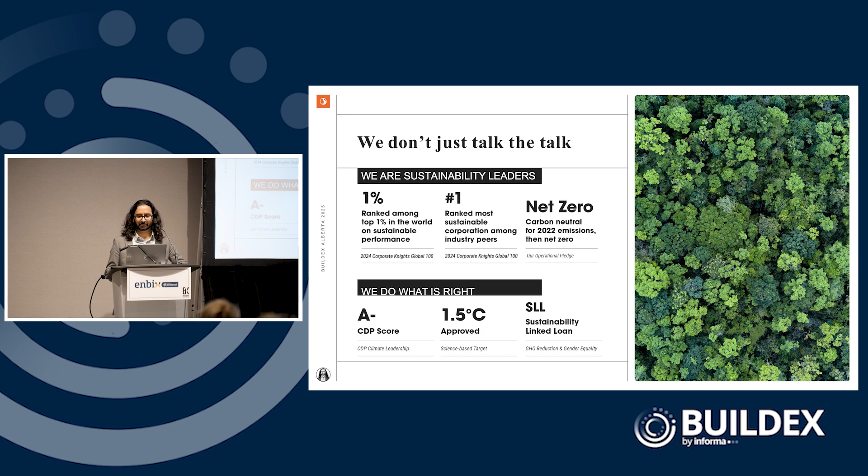At Stantec, we're truly sustainability leaders. We don't just talk the talk, we walk the talk. We're committed to net zero and science-based targets, and we're ranked amongst the top among our colleagues as well. So Stantec has signed onto various commitments that tie into all those goals, targets set by architects for the architects and by engineers for the engineers. These industry pledges help guide our work in carbon, climate, and equity.

So getting into the presentation, what are we going to learn about today? We'll look at rethinking our design strategies potentially for schools in Alberta, and the impact on energy performance and embodied carbon in school design, as well as looking at potentially modifying our approach with a focus on occupancy to improve design influence. We're also going to be looking at comparing different school rating systems and lessons learned from other jurisdictions that we can bring to our projects from day one.

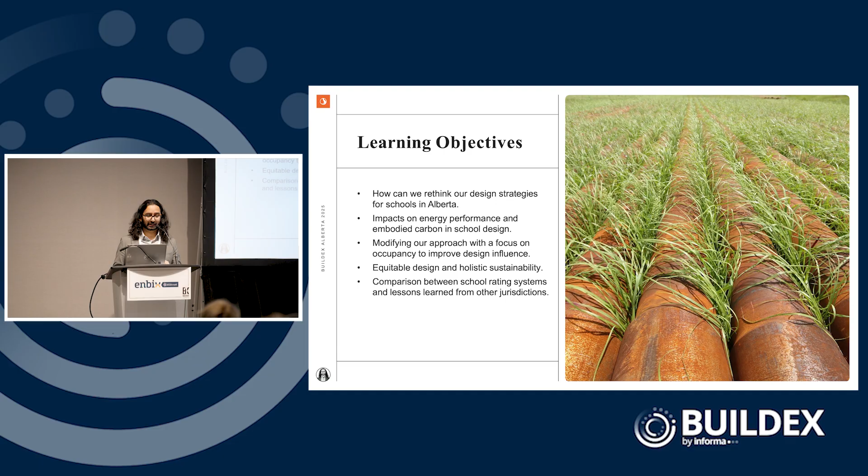So as we begin to get into this, why does this matter? The schools that we're designing and building today are where our children are going to spend most of their time. It is our responsibility to provide them an optimal, healthy, and efficient learning and teaching environment. As we looked at all those building commitments that our industry is tied to, you see 2030 a lot. And 2030 is just 50 months away.

Let that sink in. So 2030 is when we have declared that all buildings must be net zero ready, and by 2050 we're trying to achieve net zero. There's a lot of work that we need to do as an industry.

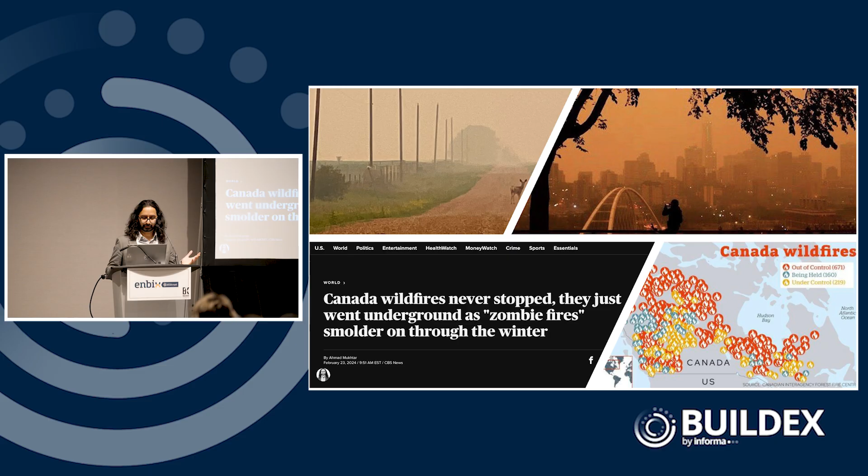As we look at understanding the impact of climate change, that's why those goals are there. It's not just warming that we're looking at. We're seeing a lot of wildfires, heat domes. We saw the wildfire that decimated Jasper. On the opposite end of the spectrum, we're seeing higher frequency of deep freeze as well. We're used to deep freeze, but they're increasing. Hailstorms - the damage from hailstorms has caused billions of dollars of damages.

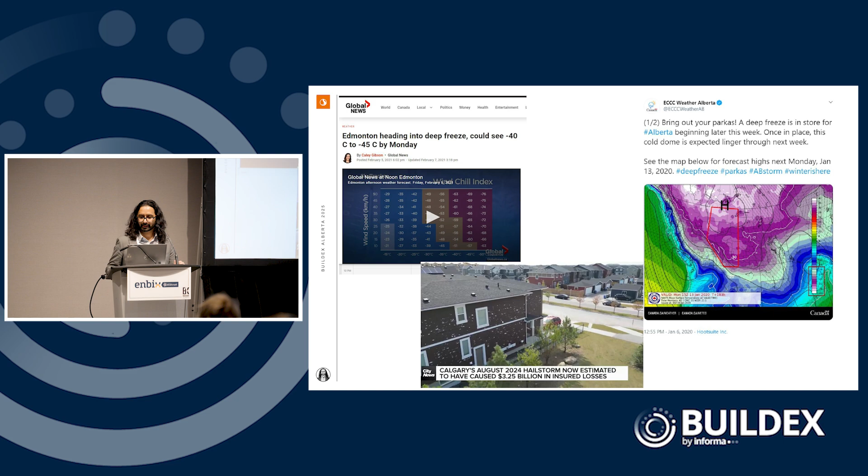So that's where sustainable buildings come in, when you're looking at more durable buildings that last longer and are more resilient to climate. With that, I'll hand this off to Colton to talk a bit more about background. Looking forward to your slides here. Thanks, Peter.

All right, so before jumping into actual case studies, we want to provide you with some background that will help set the stage for the bulk of the presentation.

The inspiration behind this presentation was the announcement from the provincial government of a major investment into schools. We're anticipating that around 200,000 new enrollments in K-12 schools will happen over the next 7 years. With that, the government has promised an $8.6 billion investment in a school construction accelerator program that's anticipated to deliver or retrofit more than 100 new schools across the province.

So these new schools or modernized facilities are there to ensure that students and teachers have the necessary space and resources for learning and to reduce overcrowding that we're seeing in our schools today. So our team thought, is this a chance to review how we design schools and reevaluate the sustainability and performance criteria that governs design to see if there's room to improve?

Looking at our current approach to energy performance in schools, there's a bunch of different standards and codes that dictate the energy performance and sustainability requirements of our school designs. Looking at provincial regulations, we've got the NECB 2020, which sets minimum performance requirements for all buildings across Alberta. We've also got school design policies such as the Alberta Infrastructure TDR requirements that set specific requirements for schools. These outline specific sustainability criteria such as certifying with LEED version 4.1 and having mandatory specific LEED credits that need to be applied to all schools.

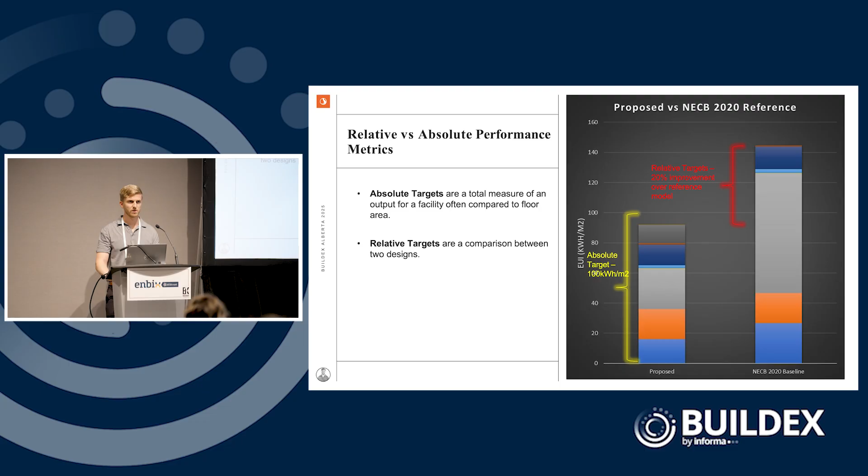But Peter and I, developing this presentation, we're asking how can we better influence design? So are our current codes and standards helping us effectively influence design? Are our current relative savings or absolute targets the best metrics to use when designing schools and other buildings? Are we designing buildings with the proper lens, or can we adjust to improve our actual design processes? And can we as sustainability consultants, energy performance professionals, climate analysts be involved earlier to influence and optimize energy performance throughout the design process?

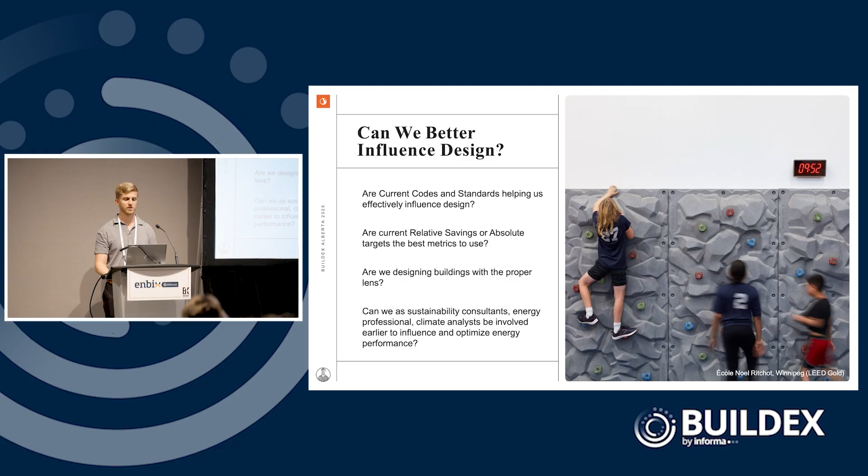Now, I'm sure we've all seen a graph similar to this where we're looking at the ability of our professionals and designers to influence outcomes. So looking at the y-axis, the ability to influence the design, and the project evolution on the x-axis, what we see is we can better influence designs earlier on during the design process, and as design progresses, we lose that ability to properly influence design, or our influence is more costly to the actual construction of a facility.

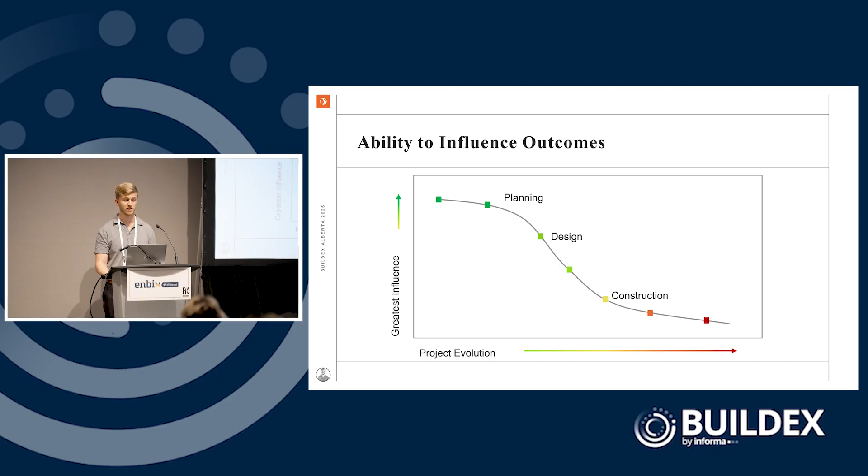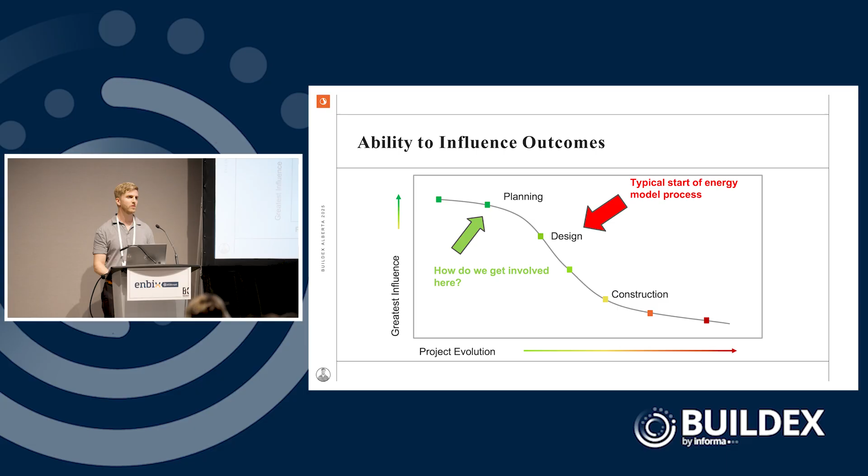So here's our typical starting process for an energy modeler being involved in the design as an energy modeling professional. We typically get involved during conceptual design or schematic design, where we develop a simple box model or energy model using floor plans or preliminary floor plans and design narratives. But how can we get involved earlier to better influence design as energy modeling professionals?

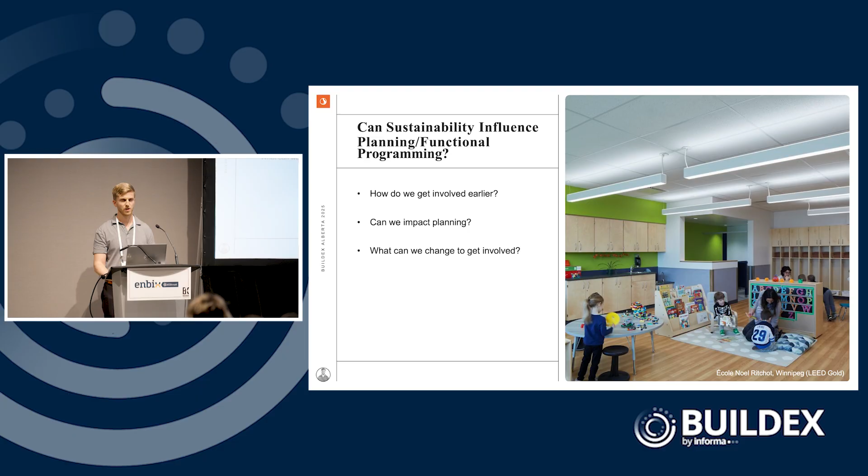So some questions that we asked are, can sustainability influence planning and functional programming? So how do we get involved earlier as design professionals? Can we impact planning, and what can we change in our processes to provide that value and get involved earlier to influence design?

Now, one of the questions we asked ourselves when putting this presentation together is, are we designing buildings too large? Are our schools and facilities being designed appropriately sized for the occupancy intended for the space? Can we improve our process by reevaluating energy and greenhouse gas emissions through a different lens? Is there a metric that would help us improve the design process with increased focus on sustainability and equity beyond what we're already using? And will this help reduce energy consumption and improve school environments for teachers, staff, and the students who are going to be occupying the space?

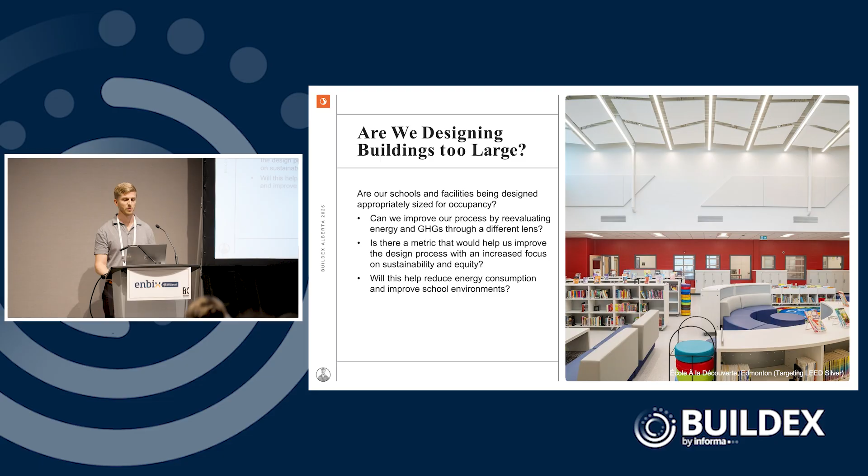So looking at potential new performance metrics that we could use to potentially influence the design. Our prior focus and our prior energy metrics that we've been using have a focus on per unit floor area. So this is EUI, GHGI, TEDI, and CEDI.

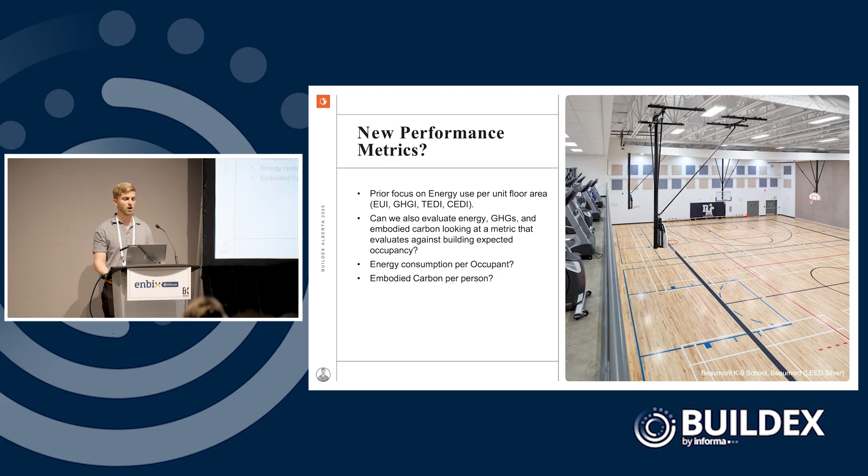But we asked, can we also evaluate energy, GHGs, and embodied carbon, looking at a metric that evaluates against building expected occupancy? So looking at energy consumption per occupant rather than floor area, and then embodied carbon per person rather than based on your overall floor area.

So jumping into the next section of the presentation, we'll look at evaluating designs based on occupancy instead of floor area. We'll start off with a simple hypothetical scenario comparing two schools using our historic metrics such as EUI and relative savings compared to the NECB, but also evaluating that school based off of the new metric that we're proposing, energy use per occupant, and seeing how those compare historically and with the new metric.

So looking at these two different schools, we've got school number one, it's about 1,000 meters square with 200 occupants. School number two, 2,000 meters squared, so double the size with the same amount of occupants set at 200. So evaluating those through the historical lens of EUI and relative savings, school number one's got an energy consumption of about 250,000 kilowatt hours. Now that translates to an EUI of 250 with relative savings of 18% over NECB.

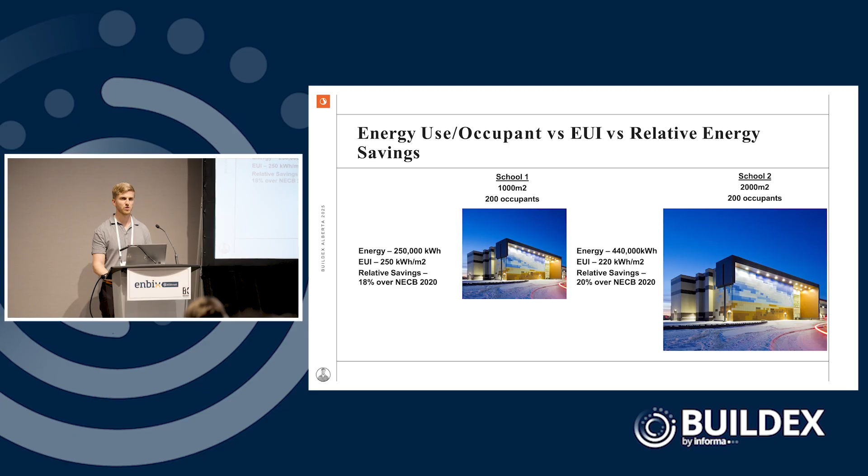Now, school number 2 is considerably larger and has energy consumption of about 440,000 kilowatt hours. The EUI is set at 220 kilowatt hours per meter squared, and the relative savings is about 20% compared to NECB 2020. So based off of the metrics that we've used in the past, school number 2 looks a lot better than school number 1 with that more energy efficient EUI and higher relative savings compared to code.

But if we change it up and evaluate that based off of energy use per occupant, we can see that school number 1 has a significantly lower energy use per occupant at 1,250 compared to school number 2, which is 2,200. So through this different lens, it completely changes our perspective on the design of these schools and how we're evaluating the energy performance.

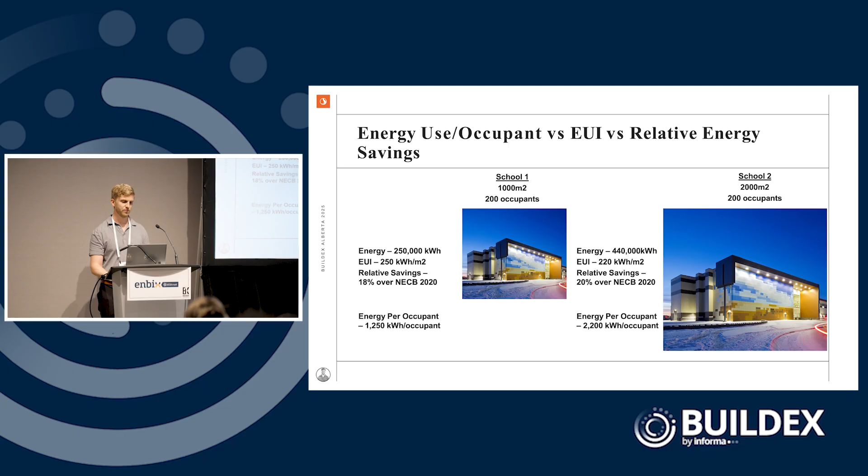Now, why talk about energy use per occupant or design per occupant? Well, it encourages design teams to really rethink the programming and sizing of rooms so that we can ensure we're adequately designing the spaces to be suitable for the occupancy that is intended to be used for. It improves designers' ability to reduce the overall energy consumption and reduces potential overuse of construction materials, saving costs and reducing embodied carbon where we're oversizing our spaces. And it increases equity across school designs, ensuring that all spaces are designed with the same intent.

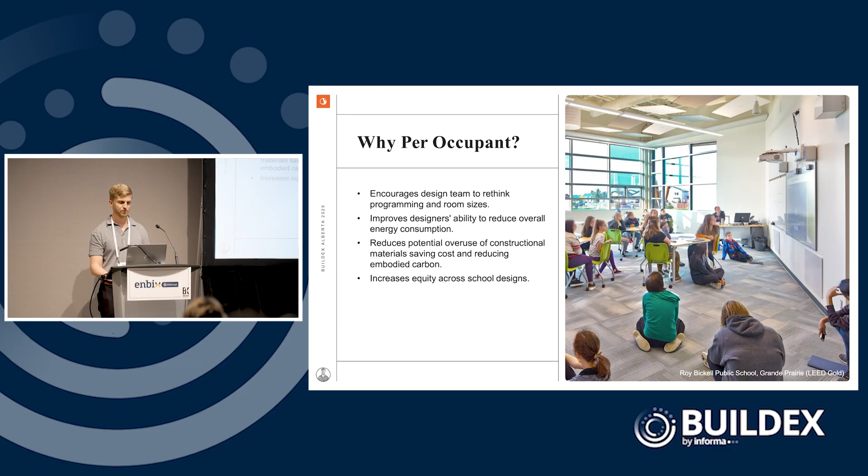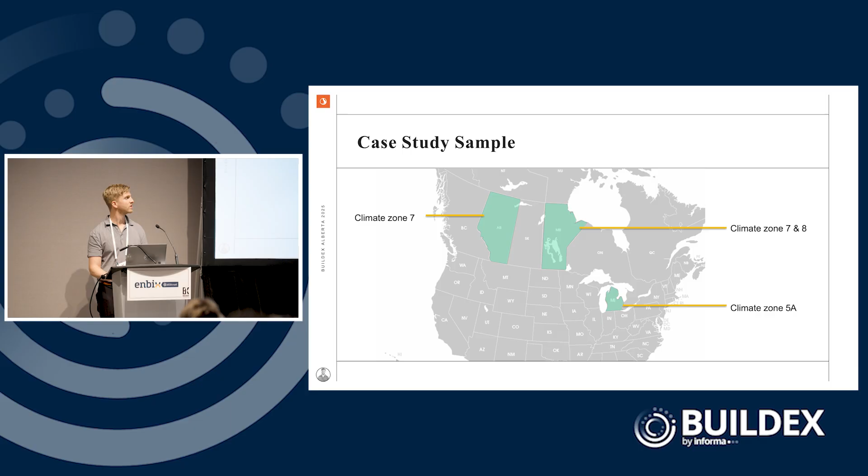Now, we'll move on to actual case studies where we're comparing actual schools that have been constructed and certified across multiple regions. So we've got a group of schools specifically designed and certified within Alberta that we'll be analyzing. We've also got a set of schools in rural Manitoba that we can cross-analyze with. And then another set of schools within Michigan that were very high performance that we'll use as a lessons learned tool to compare against our schools in Western Canada.

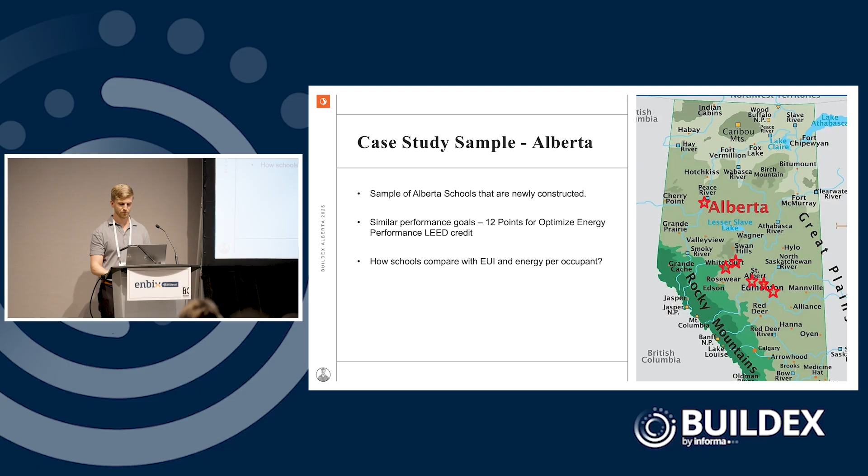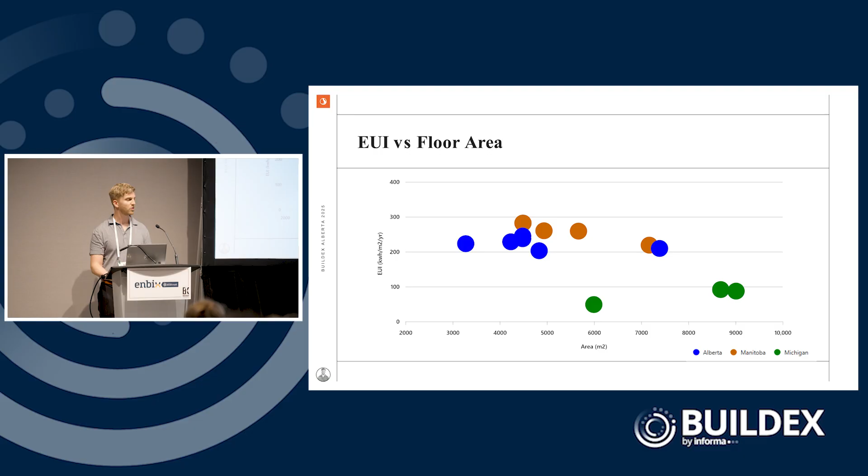So here is a data plot associated with all the different schools from different areas. The Alberta schools outlined in blue, the Manitoba schools outlined in orange, and the Michigan schools outlined in green. We can see that Alberta schools have a fairly consistent plot in terms of its EUI on the y-axis. When we look at the Manitoba schools, a little bit more energy intensive compared to the Alberta schools, so a little bit higher up on that y-axis. And then those high performance Michigan schools are quite low in comparison, and we'll dive into what these results really mean.

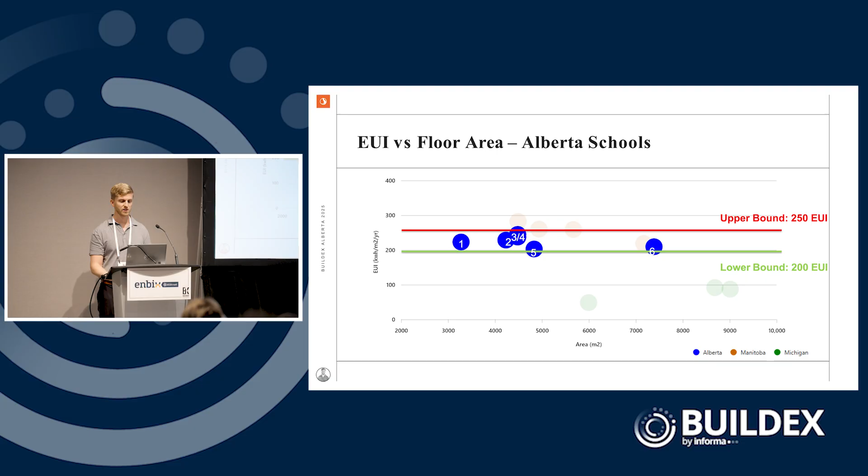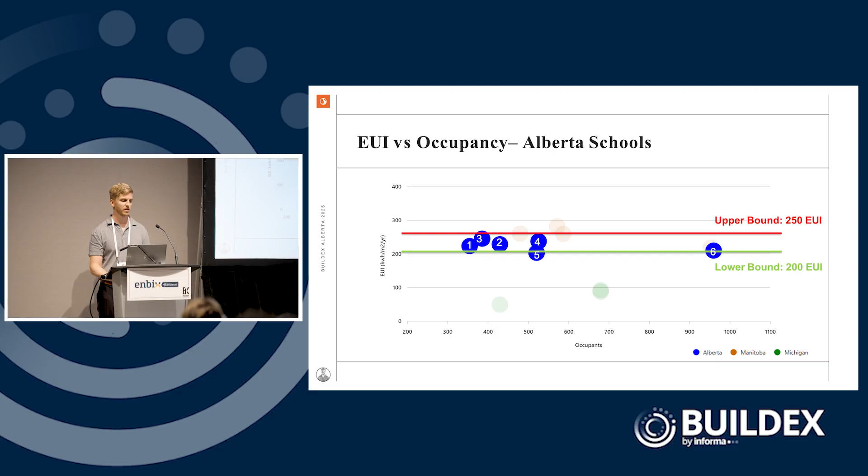So we still want to focus on the Alberta schools, so we'll dim out the other regions such as Manitoba and Michigan and really focus in on the Alberta schools that we've been involved in the design process for. So regardless of floor area associated with these schools, the EUI fits between two distinct boundaries. We've got the lower boundary at about 200, and that upper boundary of about 250. Now there's a 25% increase between that low boundary and the high boundary, showing fairly consistent results across these different schools. But when we shift to the next slide to show energy use intensity versus occupancy instead of floor area, you'll see that some of these dots deviate a little bit. And so based off this deviation, we were able to tell that there's definitely a change in perspective and lens associated with evaluating schools through the lens of occupancy as opposed to floor area.

Now changing up the y-axis to show energy use per occupant along the y-axis and floor area on the x-axis, we can see there's immediate change in the results when comparing through a different lens. There's a larger deviation from the upper bound to the lower bound when comparing energy use per occupant compared to the traditional floor area. Our EUI range at 200 to 250 showed a 25% difference in energy performance compared to all the schools. Now looking through occupancy, there's a 77% difference between our Alberta schools when viewing the building's energy consumption compared to occupancy.

And when comparing to Manitoba schools, which have a higher average EUI than Alberta schools, now they show a little bit lower energy use per occupant than our highest Alberta school that we see on the data plot.

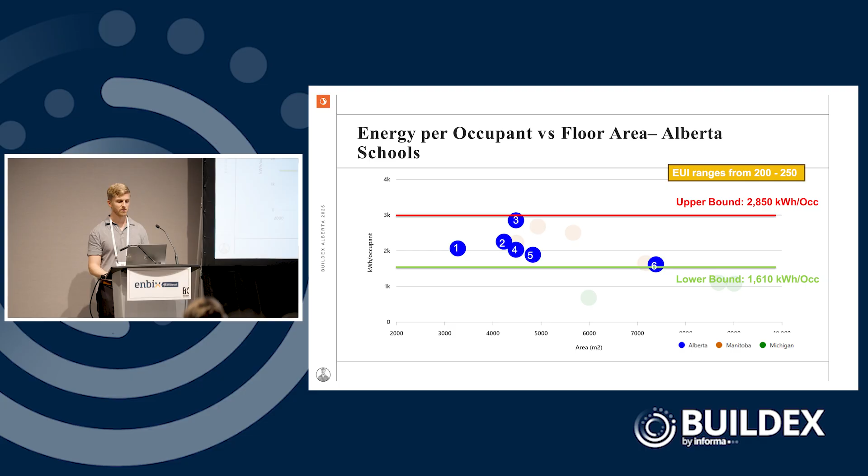Is the minimum performance similar to what we see in the BC step code appropriate, or does limiting building size too much create risk of designing spaces too small? Would a range with upper and lower bounds be more appropriate to design buildings within a boundary?

We still don't know. But by adopting this lens and benchmarking the available data through newly constructed schools and existing buildings, we believe designers can better position themselves to serve clients and ensure we are designing spaces that are better sized, providing a more equitable learning environment based on a more holistic view of energy use. This metric wouldn't necessarily be recommended to replace EUI or relative performance, but could be used as an additional tool in our energy modeling process to evaluate energy performance of schools.

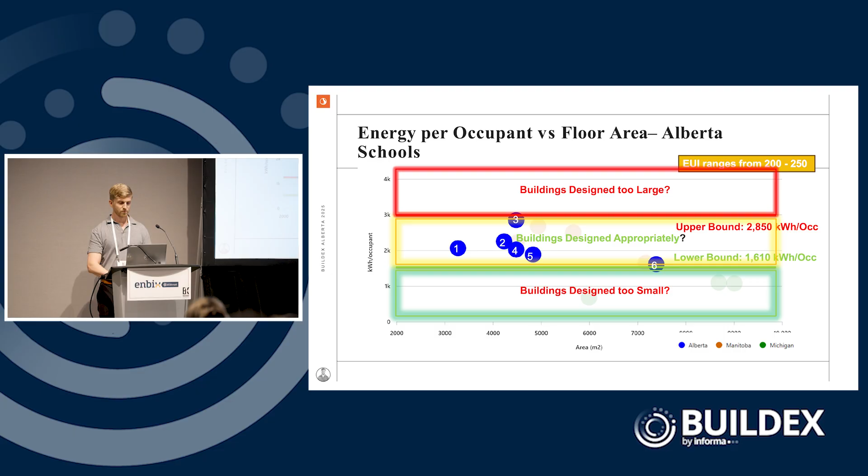Now, switching over to analyze the data points associated with the Michigan schools, the EUIs are very different than what we were seeing in Western Canada, so their EUI range has significantly decreased down to 49 to 92 compared to Alberta, which is around 200 to 250.

So how can we modify this new metric associated with energy use per occupant to work with changing performance requirements? Could it be used like step code with increasing performance so that when we're looking to achieve higher tiers of performance associated with building design, we also adjust that range to suit?

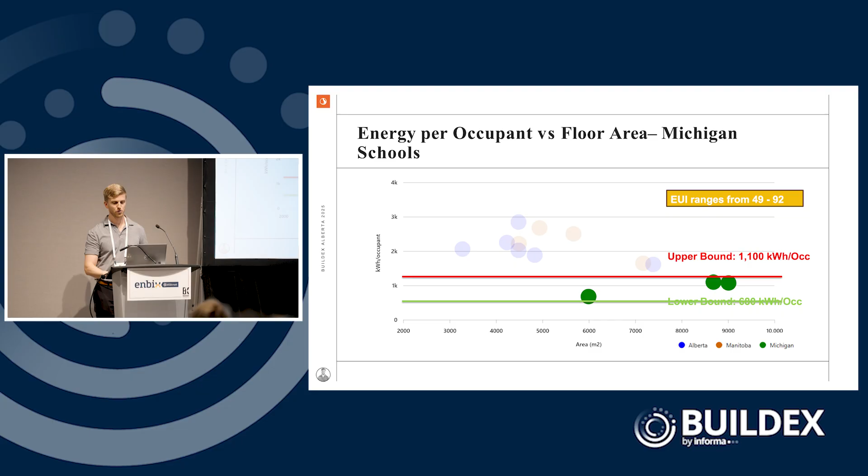So some considerations when comparing these different groups of schools. Our Alberta and Manitoba schools focused on traditional systems such as gas or electric boilers. Our Michigan schools, which are much higher performance, incorporated high performance electric systems such as air source heat pumps or geo-exchange heat pump systems with a bigger focus on long-term savings.

So these schools used tools such as life cycle cost analysis to evaluate lifelong or building-long costs rather than upfront costs to determine which mechanical system was most appropriate. They ended up going with those high performance alternatives rather than the traditional systems we often see in Alberta. Because they electrified their building, they also implemented a larger scale rooftop PV system to offset some of their increased electricity consumption, further reducing energy consumption and increasing the energy performance of their schools.

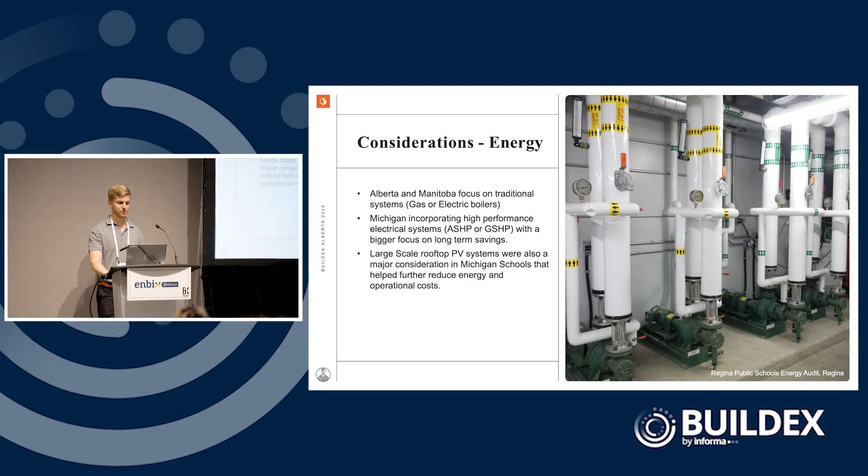Now, some other general considerations associated with school designs that may cause variations and influence different values in the performance of our buildings. There's differences in heating and cooling seasons even across Alberta, so we operate between climate zones 6 and 7. Depending on how far north or how far south you are, you might see variations in the performance of your schools that could dictate the energy performance of your building.

Facility programming requirements could also have an influence. So schools with shop classes compared to K-6 schools which don't have shop classes might have different energy consumption associated with those facility programming requirements. There's also consideration associated with expansion in the future. So if your school is anticipating a larger volume of students and we initially designed the school to have an expansion, that could influence energy consumption up front.

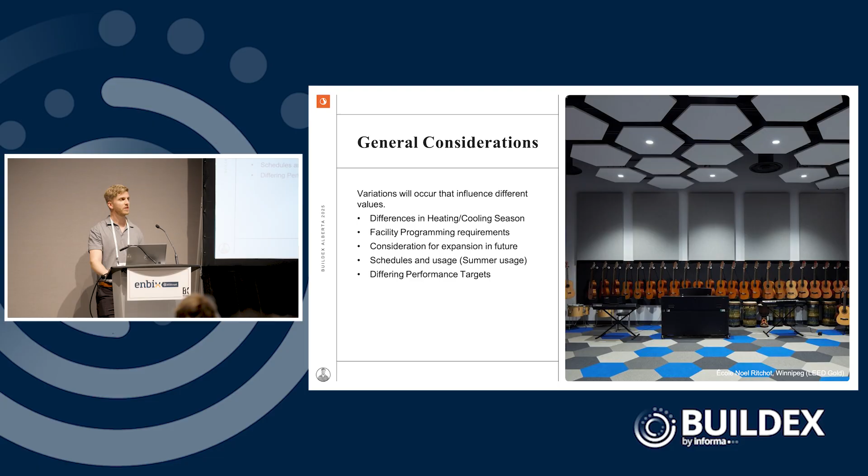And then school schedules and usage. Will the school be used during the summer? Will the school be shut down during the summer? Will it be shut down during the winter? Will the community be using it sometime in the afternoon or in the summer when it's historically shut down? This is also going to have an impact on your overall energy consumption.

And then differing performance targets. So if we have different performance targets dictating the energy performance and design of our schools, then we can see variations associated with our energy consumption. So I'll pass it off to Peter to talk about some of the more holistic sustainability requirements associated with school design.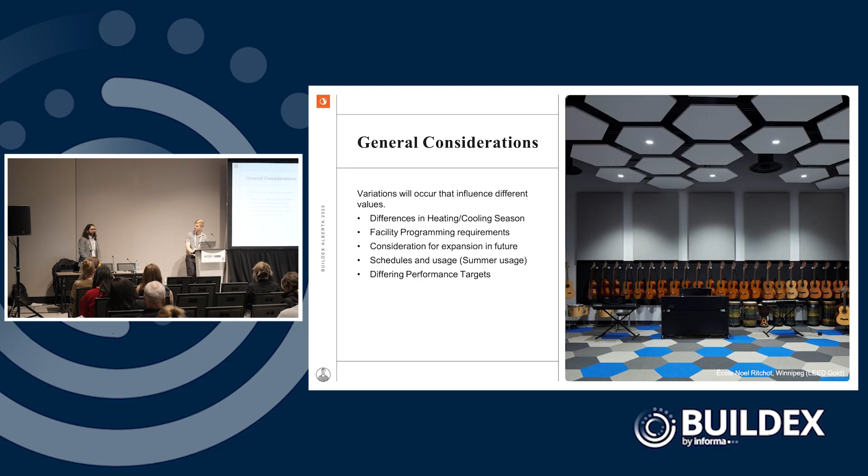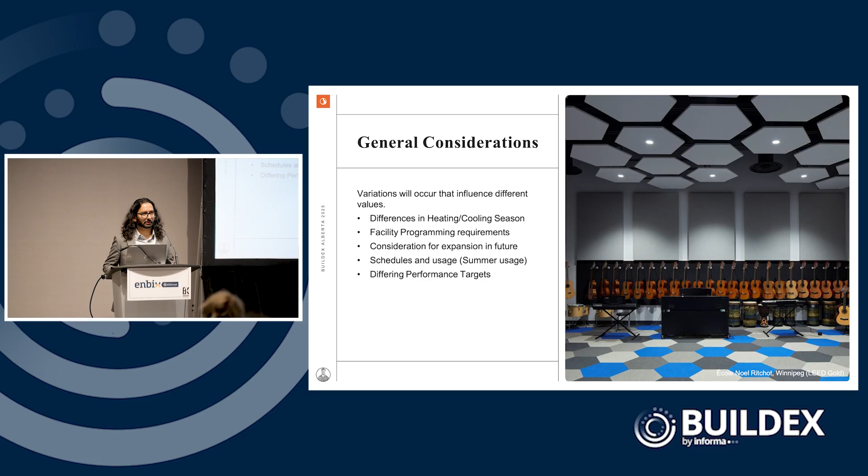Thank you, Colton. Lots of great data and some considerations that we can implement in our projects here. Now, Colton has walked us through operational carbon. Operational carbon is all the gas and electricity bills that make us angry, and we want to reduce those as much as possible, right?

So that's operational carbon. Now I'm moving towards the embodied carbon portion of the equation. Embodied carbon is basically the carbon associated with where your raw materials are sourced from, how far they travel to the manufacturing facility, and from there, how far they go to your project site, installation procedures - everything involved around the energy that goes into manufacturing, transportation, and installation of that product.

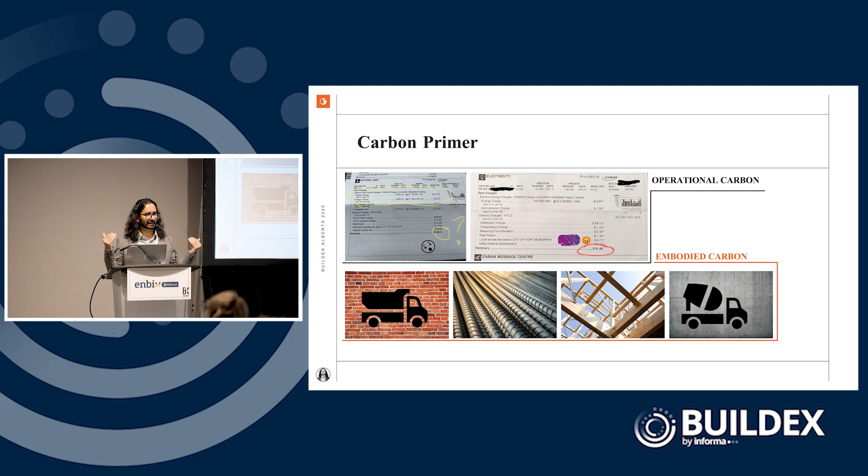The materials that we're surrounded with - drywall, concrete, steel, everything - already has embodied carbon in it. That's not carbon we can retrofit out. You have already spent that carbon. So we're going to be talking about embodied carbon here.

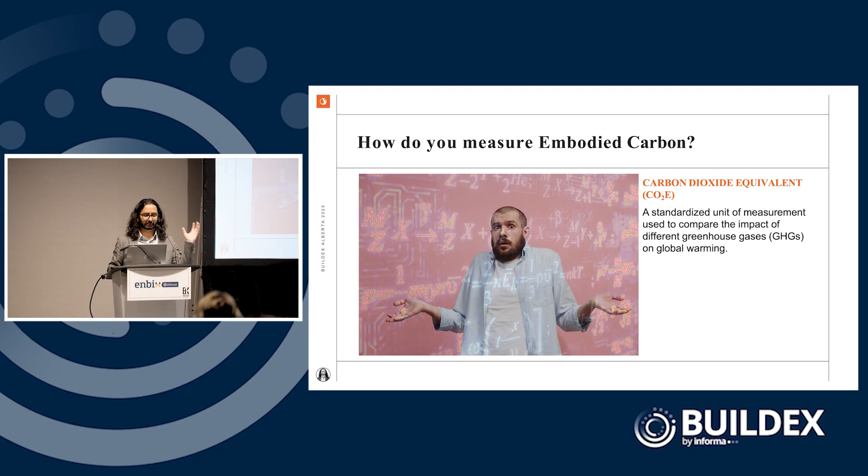Now, as we get into embodied carbon, how do you measure it? The measure you'll see in the next few slides is carbon dioxide equivalence. Why do we use this metric? Because there are other greenhouse gases we need to compare with, and we need an apples-to-apples comparison. So it's a standardized unit of measurement where other gases are given an equal proportion to have an apples-to-apples comparison.

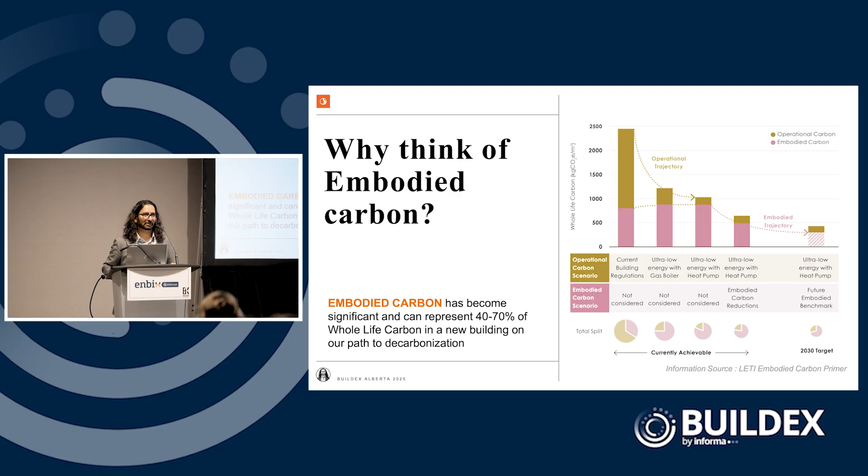Now, why do we want to think about embodied carbon? As Colton walked us through, energy codes are evolving and our buildings are getting more and more efficient. The more efficient our buildings become, the more important the conversation around embodied carbon becomes, because that could represent 40 to 70% of your total carbon in your building.

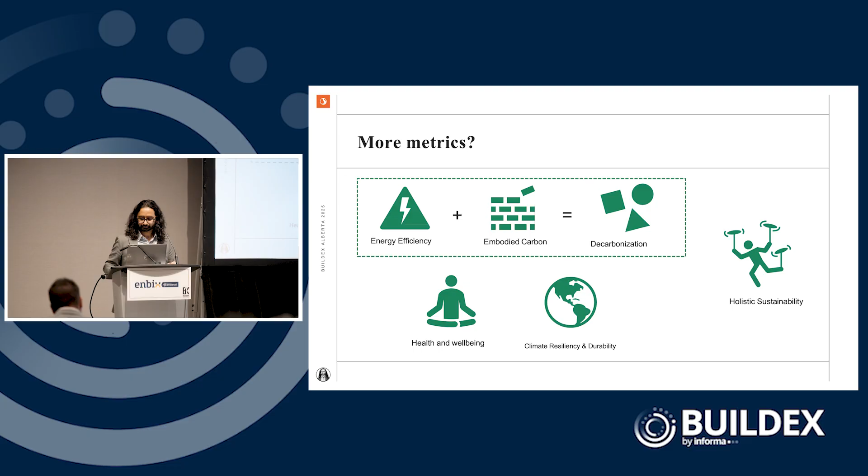So it's really important, a big part of the decarbonization equation. Decarbonization is a term you'll continue hearing over the last few years - it's basically operational carbon plus embodied carbon. A few other things I'll talk about shortly are health and well-being examples, climate resiliency and durability, and how we balance all of this with holistic sustainability. So let's get into a few more graphs here for the data nerds.

So there's a unique story to tell about these schools. They're located in northern Manitoba, and to get to these communities you have to access them through winter roads. If you need to get there in summer, you can only fly in. Think about all the logistics, procurement challenges, labor challenges, and everything involved around building these schools. We were able to keep our embodied carbon relatively low, as we'll look at in the next few slides.

For these, there was also a financial incentive in place, because if you reduce the amount of waste generated, you have to haul a lower amount of waste. At the same time, for transportation costs associated with materials, we incorporated a lightweight superstructure in these buildings that helped reduce embodied carbon, combined with a few other best practices we incorporated.

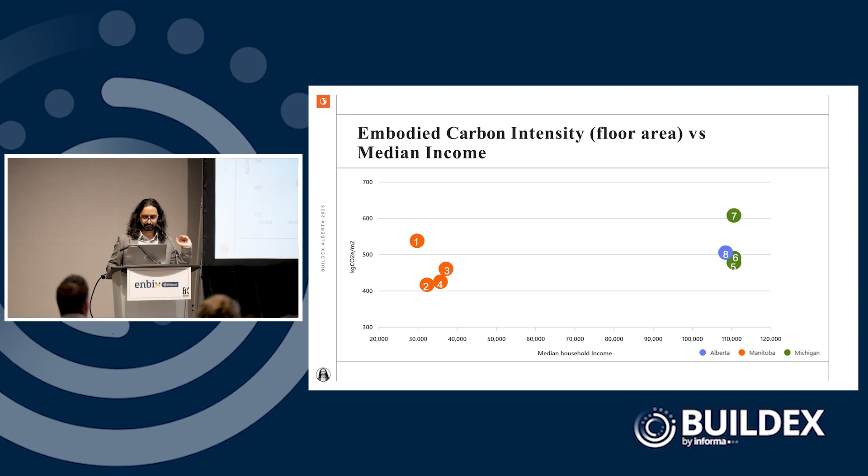The next metric I'm going to compare this against, right now we're looking at median income. I'm going to switch the x-axis now to capital cost, swapping between these two a few times to show you the comparison.

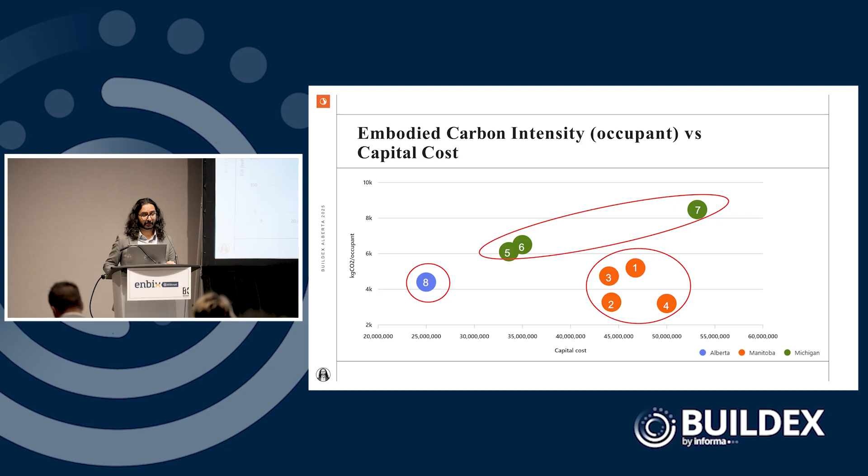We're going to switch to another different metric now. So this was all embodied carbon - we're going to switch back to energy use intensity again, comparing that with median household income. So Manitoba schools on the left, again, given the challenges I mentioned from a median household income standpoint, are on the lower end. Now, why are these schools on a higher end of EUI?

This is another conversation in itself, but to make it brief, there's no one solution that fits every single project. We have to consider what operations staff is able to utilize in terms of systems. If we provide complex systems in every region, that's when you end up seeing those complex systems being bypassed, and suddenly, boom, your projected energy savings are gone.

That's something you have to work with the operations staff on. And we understood that these Manitoba schools, 1 through 4 that we're looking at, required that simplicity so they could be maintained by the operations staff.

Now, this Manitoba school on the right with zero as representation is located in urban Winnipeg, but it's on the higher end because it's a renovation project. We still did a great job reducing energy use, but there are challenges around renovation projects too.

Going towards Michigan schools, they show lower energy use in high income areas, thanks to early goal setting targets and coordinating those targets to reduce energy usage here.

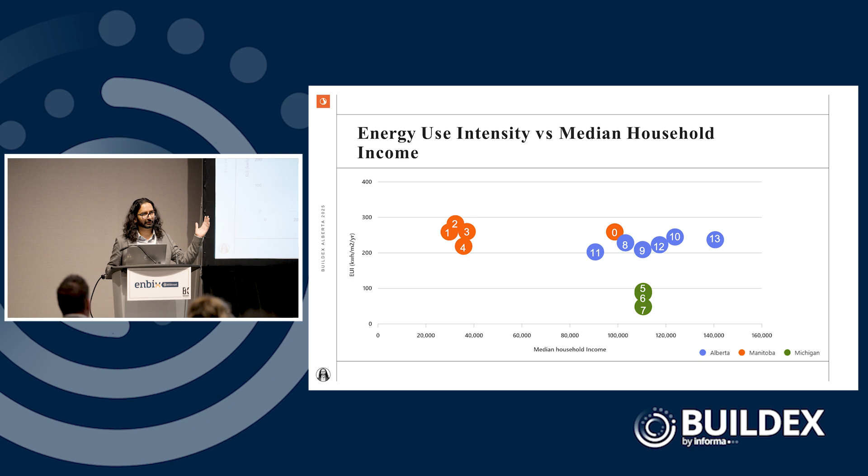We're going to look at more of this story later, but one thing I want to compare here now, similar to embodied carbon per floor area versus occupants - in a similar way, when we compare this by occupants, the energy intensity on the y-axis, we're seeing that spread again. Through this we can draw some conclusions, but as Colton mentioned, we don't have a concrete conclusion that this is the way we should compare or replace EUI. What we're saying is we can potentially use this as another lens to design some of these spaces.

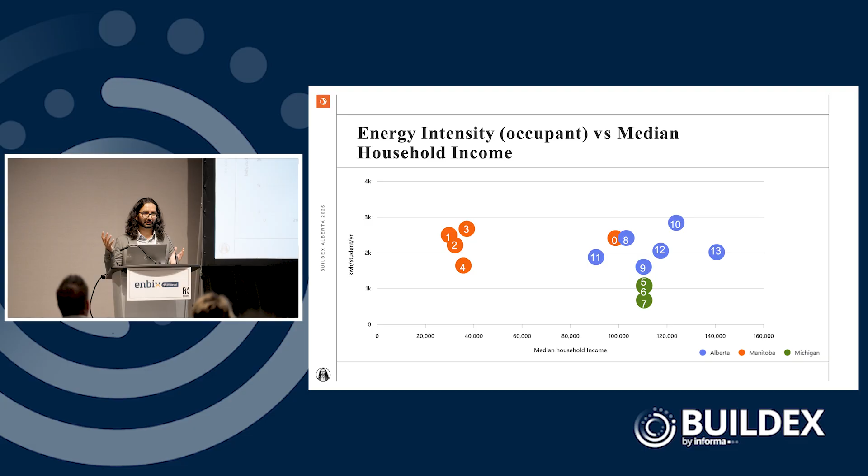The next metric I'm going to bring up is EUI versus capital cost. So the four Manitoba schools we're seeing on the right - 1, 2, 3, and 4 - show high EUI despite significant investment, due to simplicity as we discussed. One Manitoba school you see closer to the Alberta schools, which will come up in a bit, given the challenges of a renovation project.

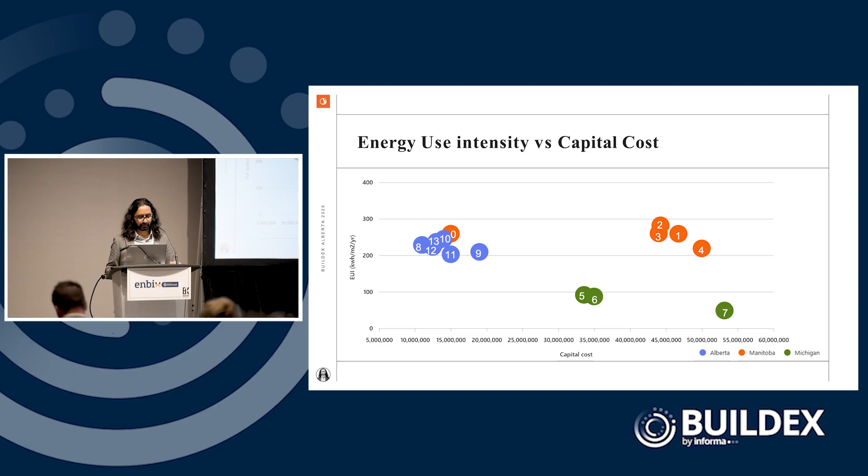Michigan schools show higher investment and better outcomes with long-term savings in mind. So this is, in a way, a call to rethink our funding priorities, looking at Alberta schools with a relatively higher EUI and low investment despite high median income. When we start comparing all these, we can really rethink our funding priorities and think with long-term in mind.

When we compare this EUI versus capital cost from an occupancy standpoint too, we see between the two the same spread as before. So the equation stays similar in a way, but that spread could mean we can potentially look at different ranges.

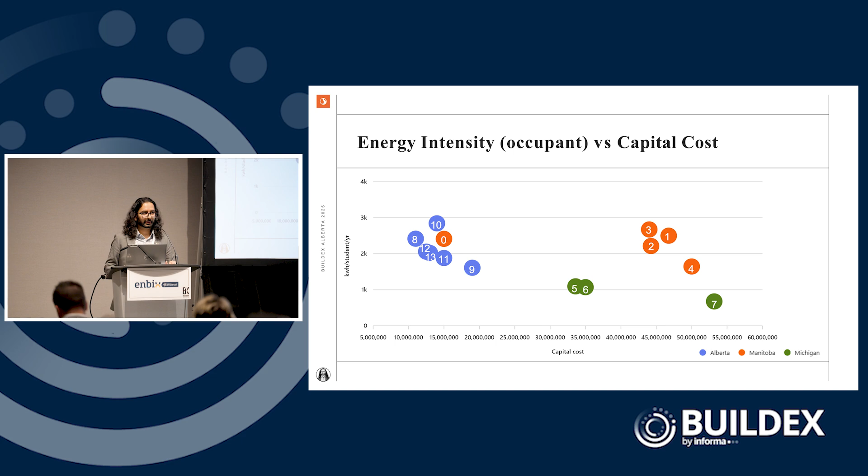Now, one thing I'd say to keep in mind is that this equation would likely shift with the $8.6 billion investment being fed over the next 7 years, and also keeping inflation in mind - these are bound to go up. But how can we reduce that gap? How can we look at this differently, with long-term savings in mind? Better funding could support more equitable, sustainable, durable and climate resilient schools.

One last graph for comparison. This one draws a bit of a contrast, showing on the y-axis square feet per occupant - looking at it by size - versus capital cost. So one thing we can say is the larger schools can still be high performing. The Michigan schools previously, from an EUI standpoint, we were asking: is it designed to be too small? But it's not.

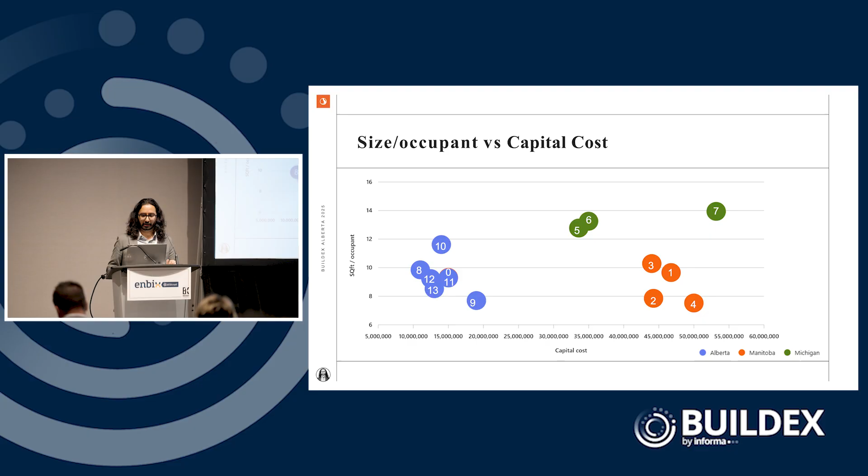Now we're going to compare holistic sustainability. From a LEED standpoint, when comparing urban versus remote and rural locations, remote locations usually have to prioritize energy efficiency, water use reduction, and indoor environment quality. Urban locations usually have it a bit more balanced because of better connectivity, location, transportation, and site options, plus the simplicity in systems we see in remote and rural environments. In urban settings, you have more opportunity to tap into complex systems.

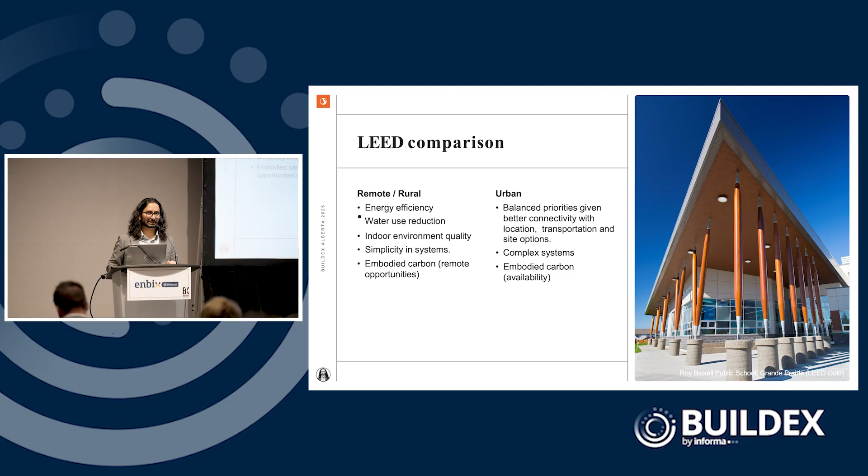Embodied carbon is interesting because if we can reduce embodied carbon in those remote schools, we can absolutely do that in urban environments too. One last thing I'd add quickly: those remote schools we looked at in northern Manitoba were LEED Gold, every single one of them. So if we can do that there, we can absolutely do that in Alberta, in urban or rural environments.

Now we're going to shift to Michigan projects. What are the lessons learned that we can incorporate here? Those Michigan projects pursued a rating system called CHPS, which is a specialized rating system for K-12 schools. It has been acquired by USGBC, so a lot of the requirements are going to fall under the priority stream for LEED version 5. LEED version 5 is a whole conversation in itself, so if you have questions about it, feel free to reach out.

Yeah, that's the rating system we utilized. A few other highlights from those projects: anti-idling measures, radon testing—yes, we do radon mitigation, but with radon testing you're able to tell if we need more mitigation. Share table storage and donation was another interesting thing we incorporated. We provided an additional refrigerator for any leftover meals for the day, which would go towards nonprofit organizations so there's lower food waste. We also incorporated operational IAQ plans.

CPTED principles—crime prevention through environmental design—help us build schools a bit safer through design. Some examples include natural surveillance through clear sight lines, or utilizing landscaping to show where public and private spaces end. So a few examples there.

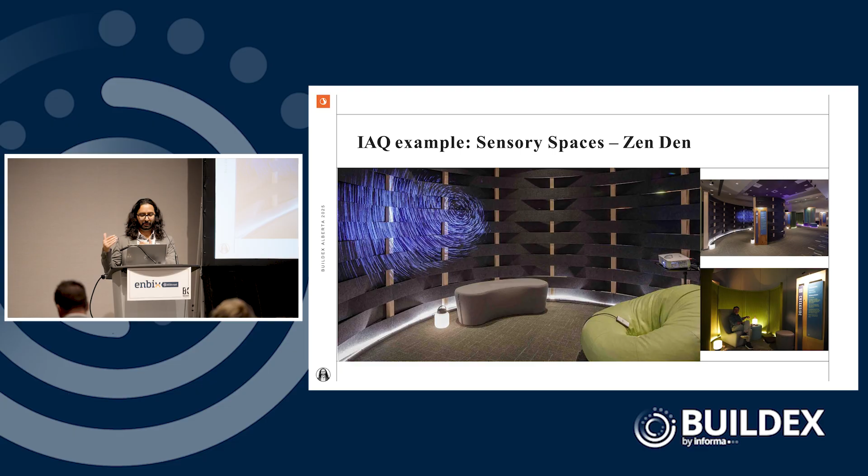One last example I'd like to share from an indoor air quality standpoint: this idea came out of our talented group in Texas. It's called Zen Den—basically a pop-up prototype sensory space designed by our team that could help frustrated students or staff feel better. There's a variety of different sensory-enabled architecture spaces that we set up.

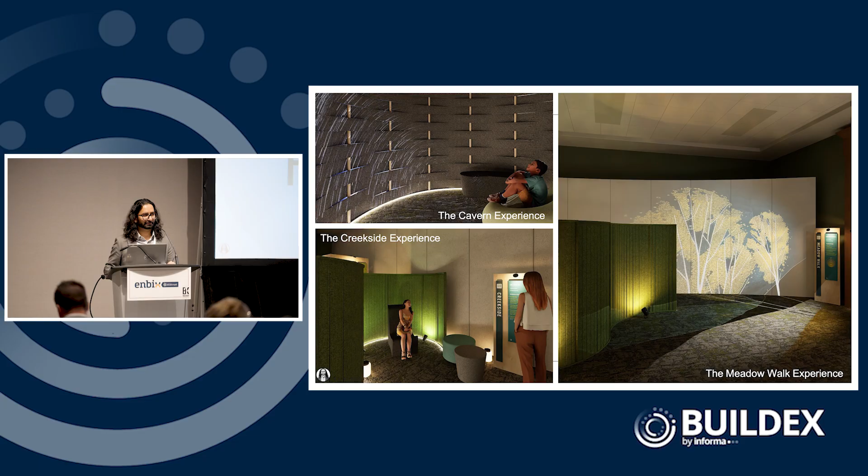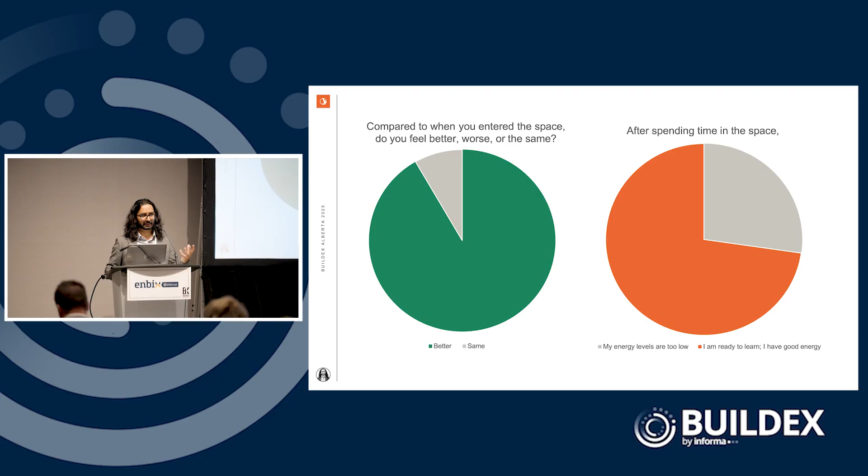Students felt more relaxed, recharged, and peaceful after utilizing these spaces. The feedback we got from students was that they felt better after using them, felt ready to learn, and had good energy. So these spaces, from a health and well-being standpoint, could be incorporated in our projects as well. Given all the positive feedback for Zen Den, it's always on a roadshow from one school to another, in conferences and universities, with overall great demand given the health and well-being benefits these spaces bring.

So we went through a lot of information today. A few key takeaways for you folks.

So today we covered energy, carbon, equity, well-being, and design influence. And new metrics we explored as well, like energy per occupant, that could potentially offer fresh perspective. And we can potentially rethink how we design our schools, not just for performance, but for justice and sustainability with long-term in mind.

We understand that early involvement of sustainability, energy, and climate teams is critical in incorporating those lessons learned early on in the project, so that we're actually integrating those instead of having them as addition items.

These lessons that we learn from other jurisdictions can really help elevate our Alberta schools. And again, a call to rethink our funding priorities as well with long-term in mind.

LCCA is a tool Colton had mentioned, life cycle cost analysis, as a decision-making tool that we utilize, that we can look at informing your long-term return on investment and diminishing returns as well.

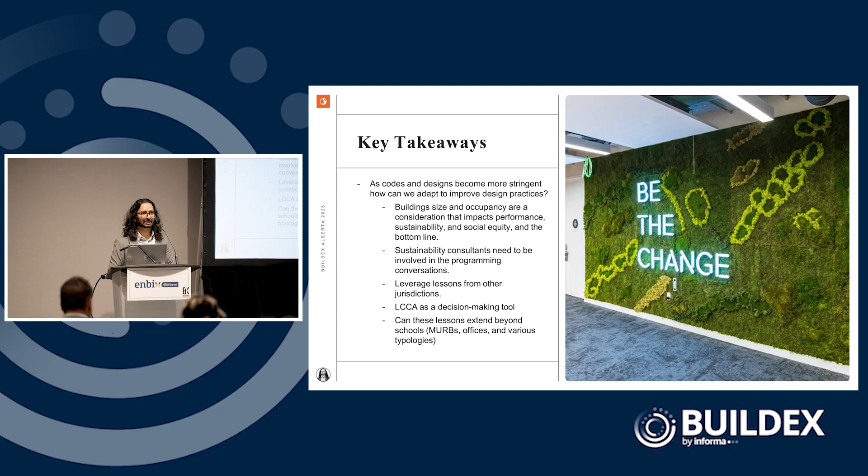I was just wondering, how do we implement some of these new metrics? I find it super interesting, because we can look at all these efficiencies and really bring down that cost. We see a lot of projects not getting off the ground because it costs too much, and we can't find that level of efficiency. This is an incredible metric to bring forward. How do we implement that at early design or pre-con, or where do we get that started?

As early as possible. As Colton had mentioned too, this is a separate lens that we can use in addition to EUI, and then start comparing spaces based on what the sizes of these spaces are, and really working with that before the programming is done. Even a lot of times, that could give us an opportunity to help inform the size of those spaces too.

And I would add that we have a lot of great data. There's a lot of existing schools and new construction builds available. We just need to benchmark that data to understand what that metric actually means. So we have a ton of different sources explaining EUI, but we can leverage that benchmarking to understand what that looks like per energy use per occupant, to really try and implement that earlier on and adjust our lens and our viewpoint from a sustainability and energy performance standpoint.